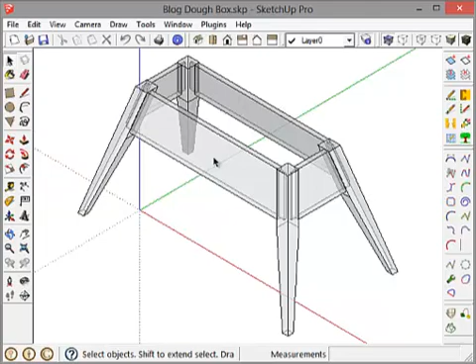So this week what we want to do, we'll go as far as we can, but primarily what we want to accomplish is put the sides on and put the dovetails in the sides. If we can finish the top, that'd be great.

Okay, so let's just start with the tabletop here. We need a top on this structure. So I'll start with the rectangle tool, and start on that corner, go to this corner. Now I want the top to overhang the legs by about 3/4 of an inch. So the perfect tool for that is the offset tool.

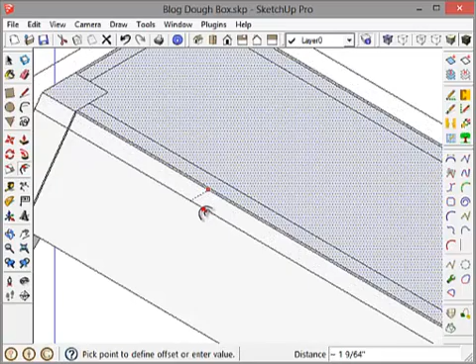I have to zoom in here. There we go. I'm going to bring it out 3/4 of an inch. Now I can get rid of the inside rectangle. Just click on it twice and it chooses the face plus its perimeter, and I hit delete. And now I can bring this rectangle, or this face, up 1 inch. I'm going to make this tabletop 1 inch thick.

And so right now I can make it a component. And for the moment, I'm just going to call it top.

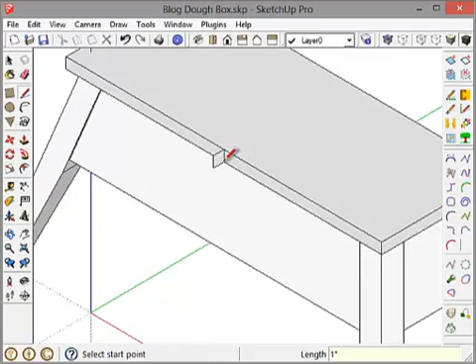And let's might as well put the trim on while we're at it. I'm going to draw a line between the center points of the top from the bottom to the top, and bring them out along the green, 1 inch, down along the blue, 1 inch, back in. That gives me a surface to work with.

Now I can take my, let's try the arc tool. Half circle right there. What I did there was I started at this center point and went out along the green axis until it said half circle. Now I can get rid of this.

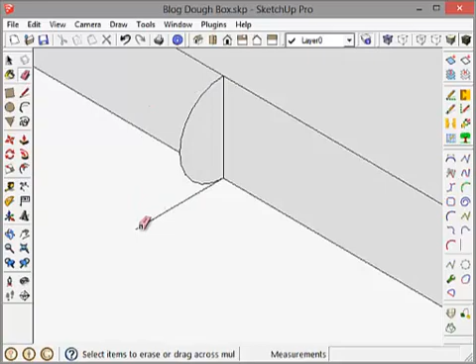Okay, now I once more want to choose a face. I can't choose this face here because it'll choose the whole top. What I want to do is create a face on the top. Now I can choose that face. Use the follow me tool. And I have trim. I have to choose that face and get rid of it. And for the moment I'm just going to make this trim a component. I'll just call it trim.

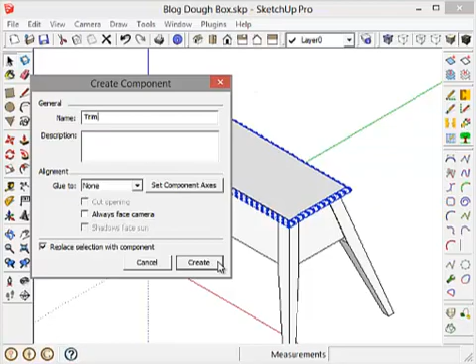Now we need to put the sides in the front and back on. We're going to use this same trick with the offset tool. I'm going to start this time with this rectangle that starts right there, that intersection, goes to the opposite corner. That should give me a face.

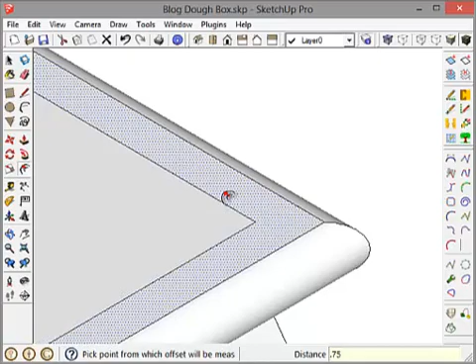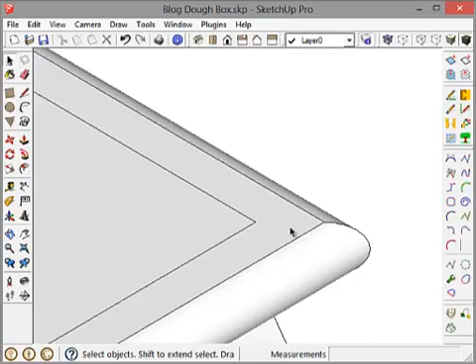And now I can take my offset tool. This time I'm going to bring it in 3/4 of an inch. And I'll get rid of this outside face and outside periphery. And I'm left only with this one.

Now, what I'm going to do, well, my side's to be 3/4 of an inch. So I'm going to bring a parallel line here, 3/4 of an inch.

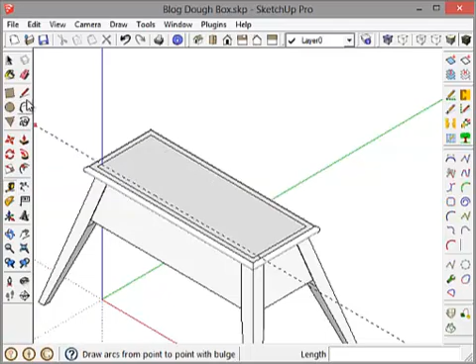And with the pencil tool, I'll draw this. Bring this up 14 inches. For the moment, I'm going to erase that, and this.

I'm going to make this a front. Actually, I'm going to call it front/back, and you'll see why in a moment. I'm having trouble with the keyboard this morning.

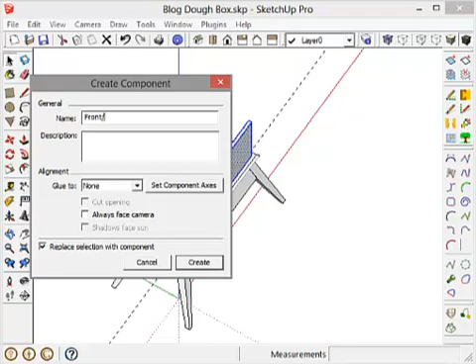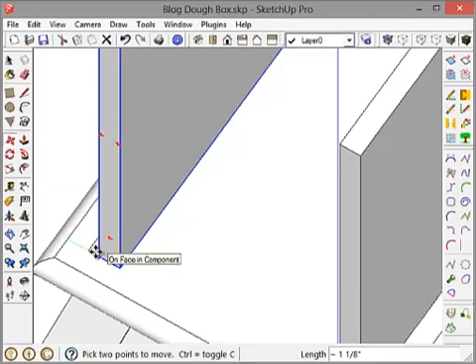And I'm going to place, move a copy of this. I'm going to use the Move Copy tool. Put it on this point right here. I'm going to flip it along green. And move it back so it's on that line. There we go.

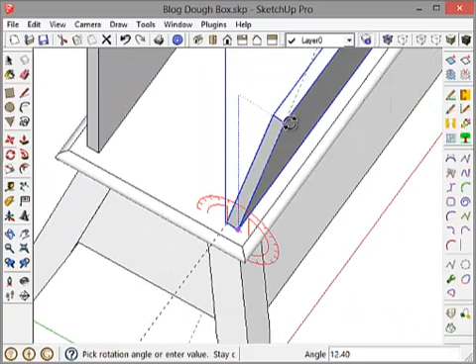The Rotate tool, and move that 15 degrees. And I'll do the same to the back. Notice, let me do that over. Notice the point I picked. I picked this front point right here, front end point right here. That's important because I want to pivot along that edge. So I've got to choose this same point back here. Whoops. 15 degrees.

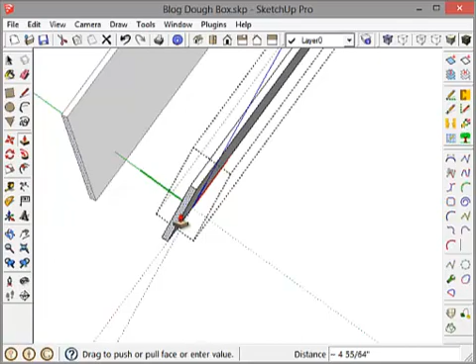Now I'm going to bring these, I'm going to go into edit component mode. I'm going to bring these ends out, an exaggerated amount. I'm going to say 6 inches, that's much more than enough. I'm going to go around to the other end and also bring it out 6 inches, much more than enough.

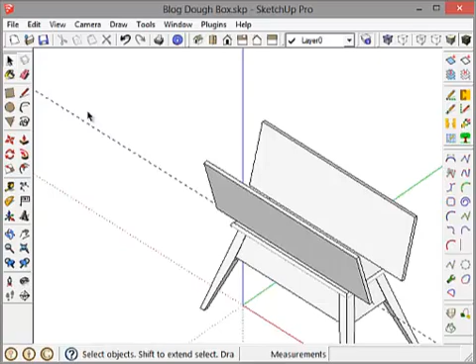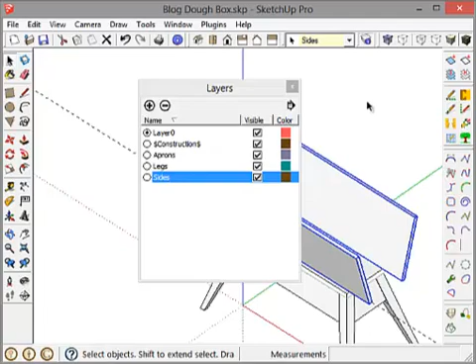All right, now that I've got those, I'm going to put them on their own layer. I'm going to create a layer here called front back. Actually, I'll put them on a layer called sides. If I bring up the entity info box, I'm going to change their name from front back to sides, and put them on the sides layer. Now get rid of the sides, because I want to do the same thing to create the ends. I'll go offline for a moment and do exactly the same thing to create the ends.

Okay, I'm back, and I've created the ends. Just to show you now what we're attempting to do, I'm going to bring the sides on. You notice the reason I extended these 6 inches was because I'm going to want to use where they intersect to shape the ends.

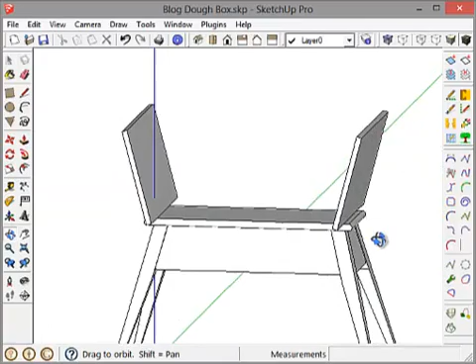But before I do that, I've got another problem. Let me get rid of the sides to show you. I rotated both the sides and ends 15 degrees along their outside edge. You notice that kept the outside edge on the tabletop, but the inside edge is lifted. That's true on both ends. And if I were to bring the sides in, you'd see the same problem, only the outside edge along the sides would be touching the top, and the inside edge would be lifted.

Well, I'm going to correct for that right now. By the way, this end here is going to be a throwaway because of the nature of these tilted things, and I'll show you in a moment. So let's go into edit component mode.

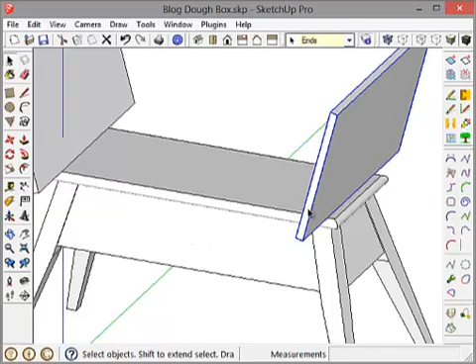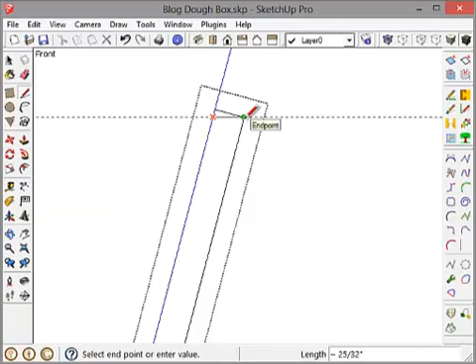Okay, the first thing I want to do is look at this from the front. Notice, because I tilted things 15 degrees, that this edge is now above horizontal. Well, to fix that, let's use the rotate, or the protractor tool rather, and make it 15 degrees. Now we can use the pencil tool, and with the push-pull I can trim that off, much like I would do on the table saw.

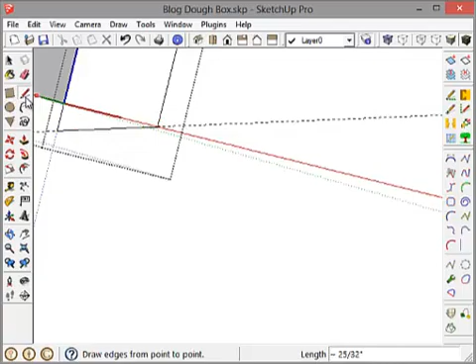Down here I've got a similar problem. So again, I'll use the protractor, come down 15 degrees. This time I have to add a line from here to here and then over to here. Now I've got a face, and I'm going to extend that face all the way to the end.

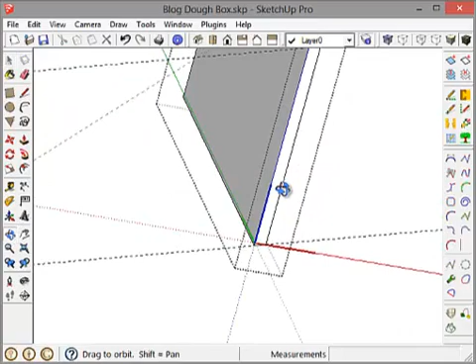I have some lines I have to get rid of. First, that one right there. And while you can't see it, there's one there, and one on the other end. This was because of how I added that little piece. I want to get rid of that one too. Okay, get rid of my guidelines.

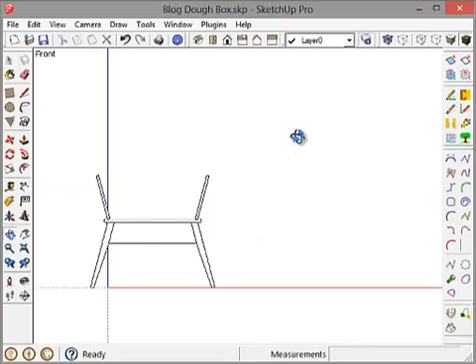Look at things from the front. Everything's fine on this end, but this end, not so much. That's okay, for now we'll just leave that there. No, let's replace it, let's replace it.

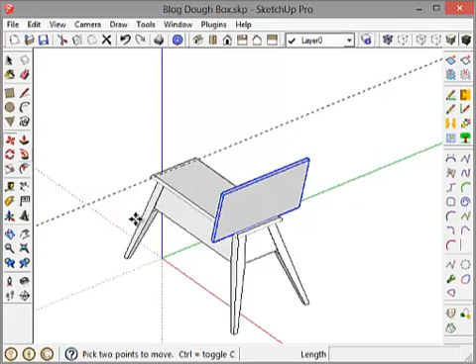What I'll do before I replace it, I'll put my guide down, right there, 3/4 of an inch. Let's get rid of this one. I think the easiest way to do this: select this, use the Move Copy tool, move the center line here along the red axis until it's on that line.

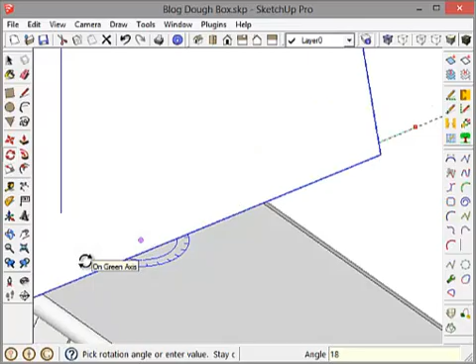And then I'm going to use the Rotate tool. Hold the Shift key down, find that center again, come out here, type 180. Let's see if that did it. That looks pretty good. There we go, now we'll delete the guides.

Okay, now I'm going to do the same thing to the end, or to the sides. So I'm going to go offline again and do that instead of wasting on-camera time. I'll be right back.

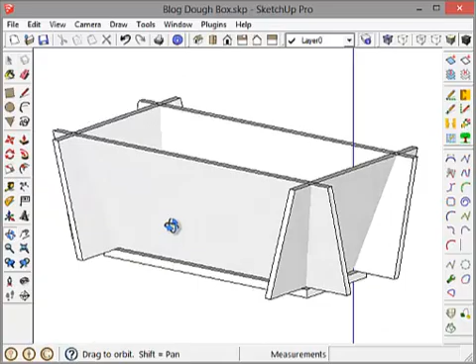Okay, I'm back. We got everything fixed, and if we examine this a little bit, we'll see that things sit nicely now. All the edges meet up here, and we're ready to give our ends shape. Now there's a couple ways I could do this. One is I could use the Edit Intersect Faces tool, but that will be a little sloppy, because if I used Intersect Faces on this end here, I'd get geometry on both the inside of this side copied onto the end, and also over here copied onto the end. So I'm not going to use the Intersect Faces tool.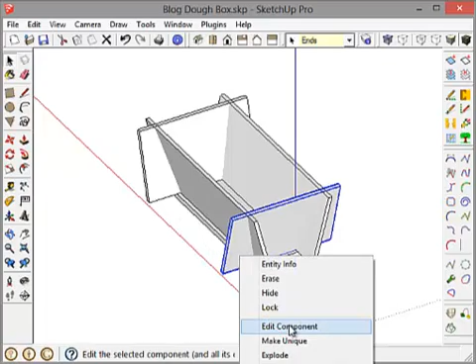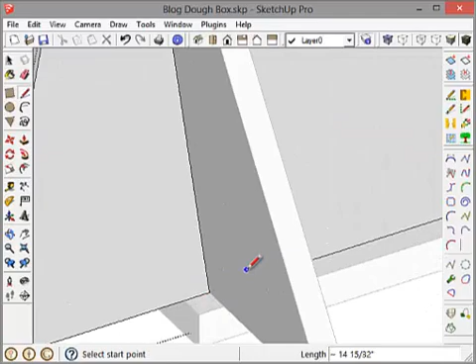Instead, I'm simply going to go into Edit Component for the end and bring back the rest of the model. I'm going to use the pencil tool to give me the lines I want. Get that intersection, that intersection, and I'll come around here and do the same. The Intersect Faces tool is pretty powerful, but I avoid it when I can. There's almost always cleanup, and in this case, not so much cleanup as extra lines you have to deal with. This is just as easy.

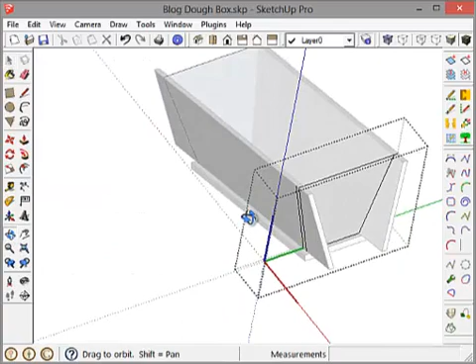Now, if I look at this from the left end, and use the Select tool in this fashion, I think I'll be lucky. Now let's see what I've got. And exit Edit Component.

I seem to be missing something here. I'm not sure why. Not sure what happened here. Oh, yes, I know what happened. I lost the line around the top and bottom. We'll have to put those back in. And that was because of the way I... well, let me just back up and show you what happened there.

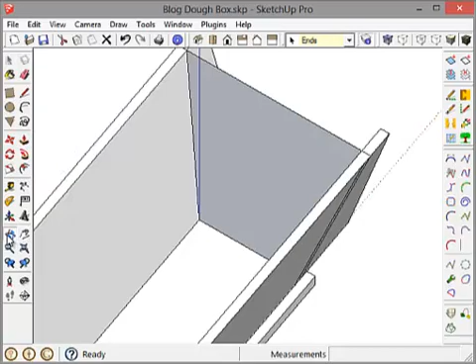See if I have all my lines. Did I not get this line? Let's just put it in here. All right, let's one more time make sure I have all my lines.

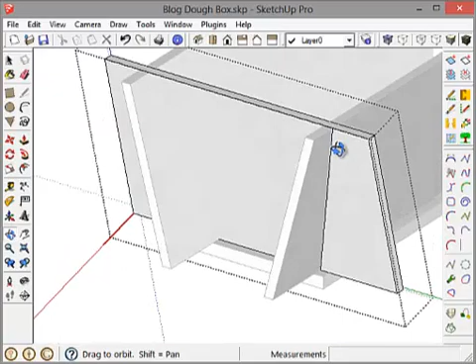I do want that line. I want that line. I don't want that line. I don't know, maybe that was the problem. I don't want that line. I do want that line. I don't want that line.

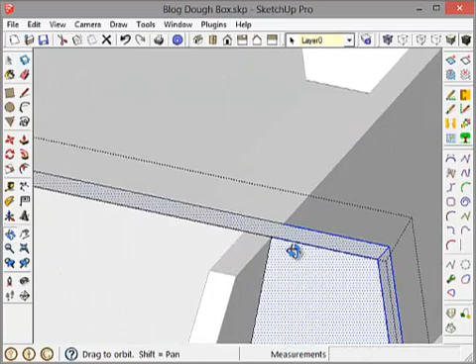Okay. Now here's the problem that I created before. If I look at this from the left end and use my select tool, notice I didn't have lines here, which I need to put in. I'm probably going to convince myself the Intersect Faces tool may have been a good choice.

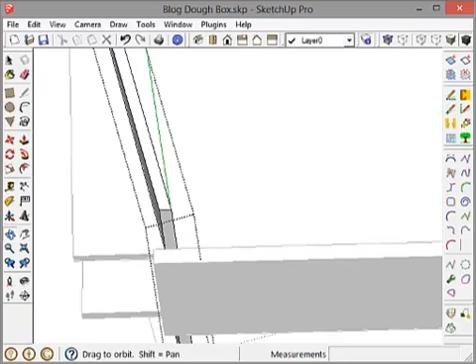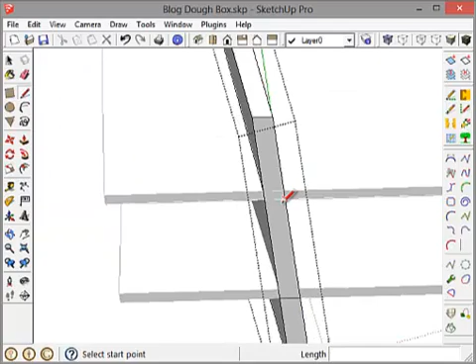Let's get rid of the bottom, or the top actually. Not sure why I don't see that one so well, but it's there. Now I need this one.

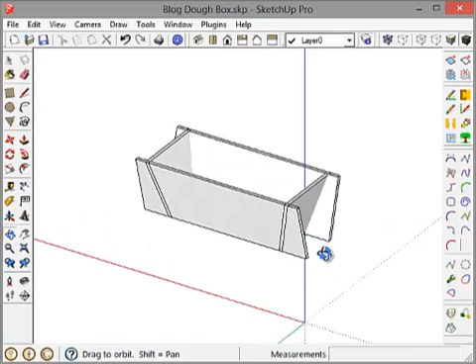Okay, now if I go to the left end and do my thing again, it should be okay. That looks much better. And I have it fixed down at the other end too.

So now I'll do the same thing to the front. Go into edit component mode. This time I'll be a little smarter. Put all my lines in. I'll even start with this one.

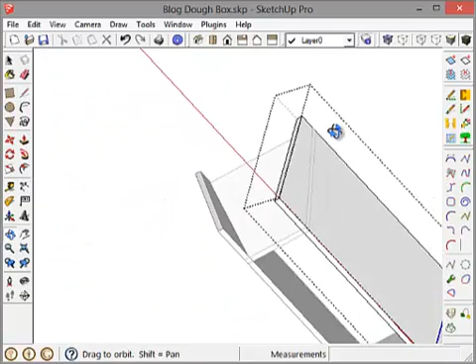There, 4 lines, that should have done it. Go to the other end. Last line.

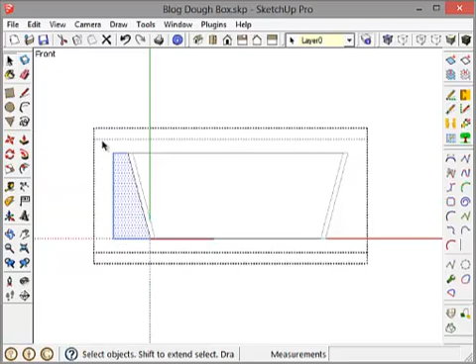I look at this from the front. I can use my select tool. And again, use my select tool. Exit. It looks like I've got exactly what I want.

Now notice I overlap these ends because that's where the tails and the pins are going to go. And so now it's time to do the tails and pins. The question is, are you a pins first or a tails first guy?

Well, I'm going to draw the pins first here. And the reason I'm going to do that is because I can avoid having angled pins if I do that. If I draw the tails first, then the pins are going to come out and slope down. And that's kind of cute. May even look good, but it's going to be harder to cut. So I think I'll do the pins first.

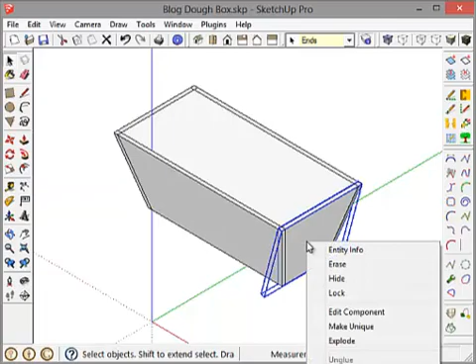To do that, let me get rid of, well, let's just go into edit component mode here. Hide rest of model. And let me look at this from the front.

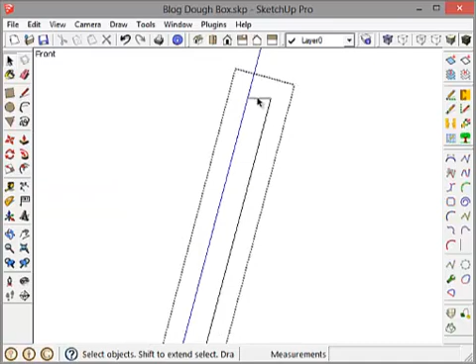Okay, what I'm going to want up top is a half pin. And on the bottom, I'm going to want a half pin. Now the half pin up top, let's start with that. What I'll do is I'll bring this down. Bring it down. Oh, let's say a half inch.

And let's bring this one up a half inch. And let me just do a little arithmetic here. Okay, I did a little calculation off screen, and let me tell you what I come up with.

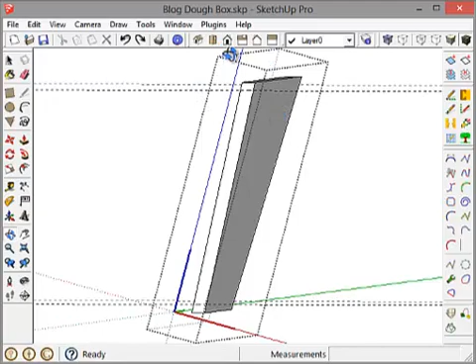First of all, I'm looking at this from the front, just so you can see what that means. Let me rotate it. That's my end piece. And I'm going to put the pins here. So I'm going to look at this from the front. When I look at it from the front, I'm not actually looking, well, let me say, you can see this front edge slopes in. So when I look at it from the front view, this bottom edge is sloping away from me.

Okay, so let's start out. This is a half pin. This is a half pin. Between them, I want 8 tails. And of course, if I have 8 tails, between those tails are going to be 7 pins. What I'd like to do is calculate what I'm going to call a cycle. That is, a tail and a pin is a cycle. Tail and a pin, cycle. Tail and a pin, cycle. But I've got 8 tails and 7 pins. That's not an even number.

Well, if I make my pins a quarter inch, what I can do is I can correct for that and use a trick. Let me show you what I mean. I'm going to use the tape measure tool, zoom in here, and put down a guide point. I'm going to start at that intersection right there. I'm going to come up along the edge. I got to be on the edge. To make sure I am, I'm going to start at that point right there, and I'm going to type 0.25. And now I've got a guide point here.

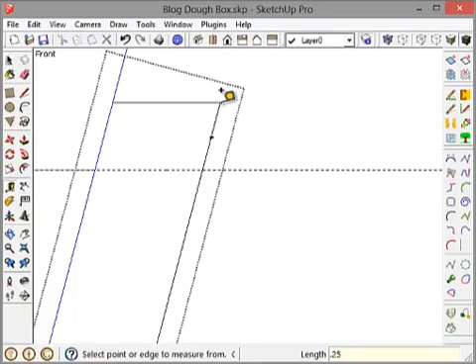This represents the 8th pin. So now, between this line and this line, I can have 8 tails, 7 pins, and an extra pin up here. That's 8 and 8. 8 tails, 8 pins. Knowing that, I can take my line tool, start at that guide point,

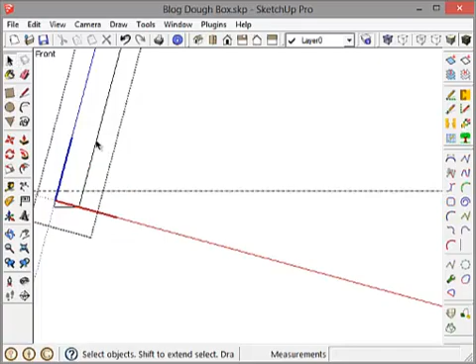come down to this point. What I've done now is created a line that extends between these two guidelines, but overshoots this one by 1 pin. So now I got room. If I subtract that one, I've got 8 tails in here and 7 pins. Well, I'm not going to divide that line mentally — I'm not going to do mental arithmetic to divide that line. Look how long this line is.

Approximately 13 43/64. If you want to divide that by 8, go ahead. I don't, so what I'm going to do is select this line, right click, say divide, and type 8, enter.

What I've got now is 8 separate lines. The last one, by the way, extends over this line by 1/4 of an inch, so I know my last tail is going to end right there. My first tail is going to start here. So let's draw in the tails.

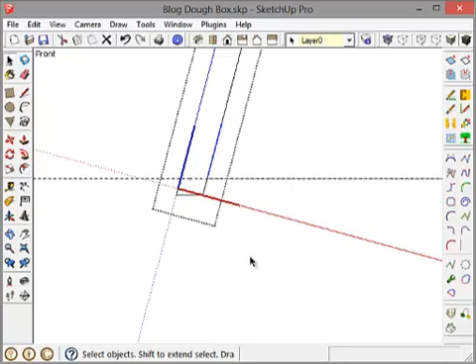I'm going to take my protractor tool, hold it over the end so I get the black protractor, and that takes the plane of the slope of that edge. I'll come down here, go to a perpendicular, and come up 8 degrees. I'm going to do the same here.

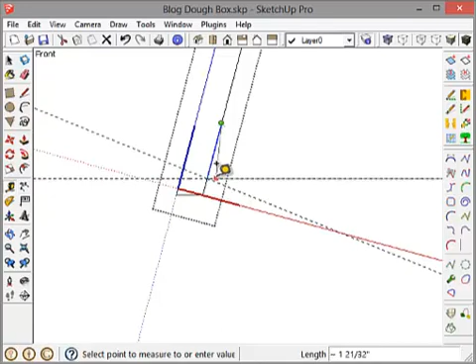No, I don't want to do the same there. What I want to do is first use my tape measure tool again. Remember, this cycle includes a pin, so I'm going to subtract that pin out of there. I'm going to type 0.25, that's the width of a pin.

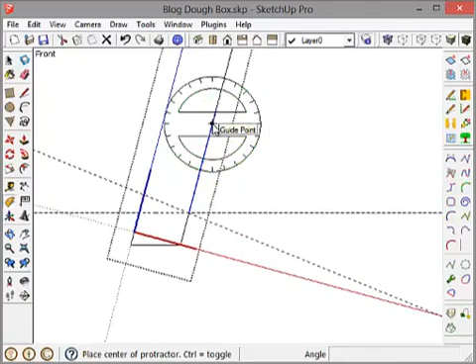Notice what it did is it put a guide point 1/4 of an inch from the end of this line. Now I can use my protractor, come down 8 degrees. All right, now I have my first tail.

I'm going to construct it here. I believe I can get rid of my guides at this point. I'm pretty sure, let me see. Okay, now notice if I go along this edge up from here, there's a midpoint, there's an end point.

What I want to do is select this line, add this line to it. Now I'm going to copy those, starting at this point right here, the low point. I'm going to slide up, that's the midpoint, that's the end point. I'm going to place it there.

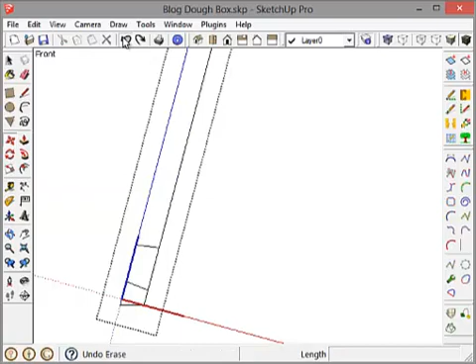My mistake, my mistake. Where I want to place it is not there. I want to place it at that guide point that I erased. All right, let me get that back. There's my endpoint, that's the endpoint I wanted to go to.

Select that line, select that line, control key. There's the endpoint I want. And now I want to type 7x, enter.

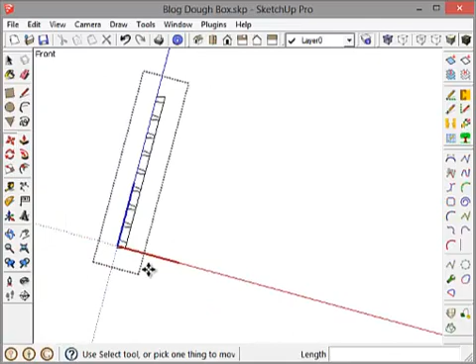Notice what that did up here is it put my last tail right in that point, which is what I wanted. Now I can delete my guide points and guidelines. Notice my half pin down here and my half pin up here is slightly different shape, and that's because of the beveling of this.

Now, what I'd like to be able to do is just push-pull these in a half inch. You're going to see I'm not going to be able to do that.

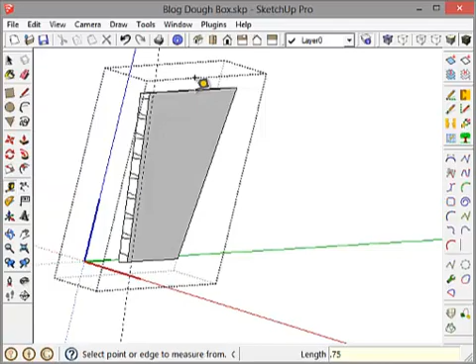Let's first of all create a half inch line. I want to make sure I'm on that face, so I'm going to choose that center point up there. And I'm going to type 0.5 - I'm sorry, 0.75. These boards are 3/4 of an inch thick. I'm going to do the same thing on the other side.

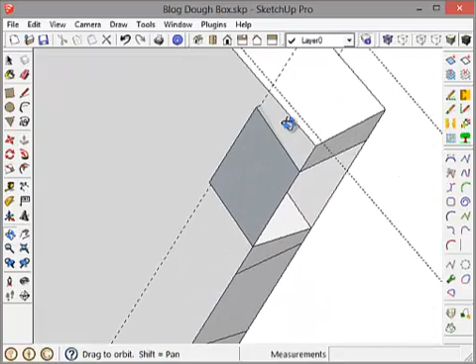There we go. Okay, now it would be nice if I could, for instance, choose that tail, move it back to this line. But I can't quite do that. Look what happens - I've got some protrusion there, and I've got some leftover here.

And the reason for that is because, again, every place we look, when you use the push-pull tool, what it does is it moves a face along a vector that is normal to that face. But everything about these surfaces are at an angle. They're not rectilinear, so using the push-pull tool is impossible. Let's back up.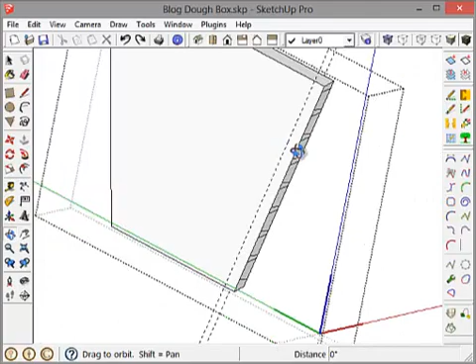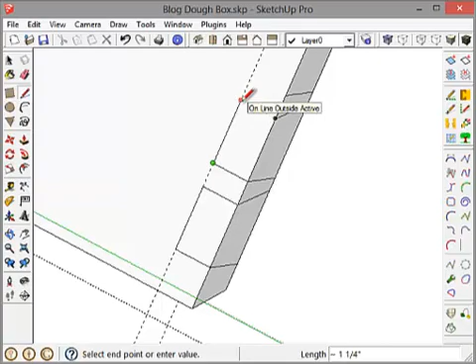What we're going to have to do is the hard work of creating a bunch of lines. The easiest way to do that is to let the Inference Engine do most of the work. I'm going to start at this point, come out here along the green, click, then come up here to this point and move it over till I see the green line and on line, and then create that line. I'll do it again, click, pick up a suggestion here for the Inference Engine. And unfortunately, I've got to do this on both sides, and even then I'm not done. I'm only going to do one - oops, shouldn't have done that.

Again, I shouldn't have done that. These repetitious things don't work out so well. I'm not a big fan of repetition. Well, maybe I'm a big fan of repetition, but I'm not good at it.

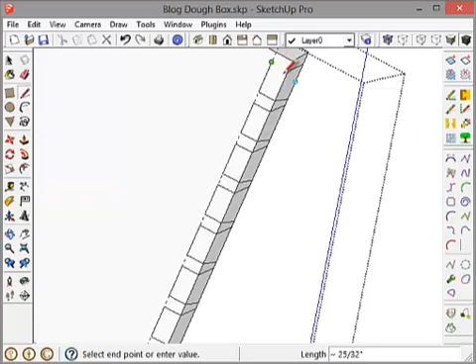Now I have to do that to the other side too. I'm going to go offline and do that. All right, so I'm going to go offline and do this. I'll be right back. I'm back.

And what would be nice is if we could take the eraser tool now and just erase these two lines. But notice when I do, I've got lines I've got to connect here. And I'll connect a couple of them, then I'll go offline and do the rest. So I just start here, here. When I do that, I get a face.

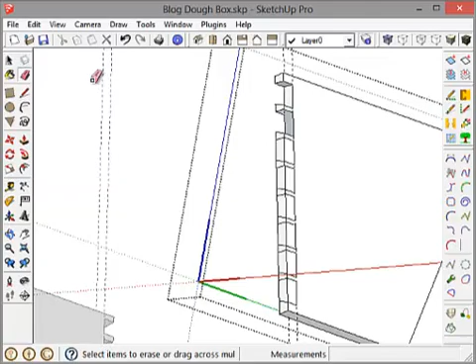Well, there we go. I got my first tail socket. And I'm going to do one more to show you I can get the pin. There we go. We have a pin, end pin, pin.

I'm going to finish this up, and then I'm going to use a little trick. Well, maybe I'll come back to show you the trick. Okay, I'll be right back. Now, while I was offline, I finished this up, brought the sides in.

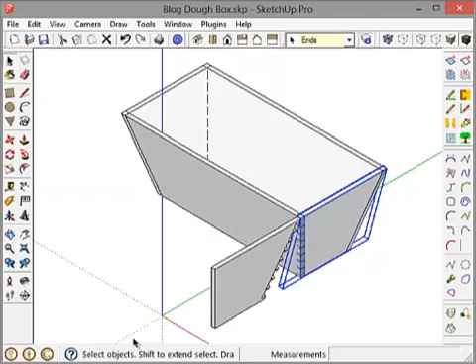I took this component with it and made a copy, moved it along the green axis, and then flipped it along green. And then I just connected them here.

And notice if I look at this from the end, and get my sides out of there, there you go. Notice they're the same, only flipped. Well, it would be nice, by the way, what you're seeing right there is the other end one that doesn't have, there you go. It's the other end, it doesn't have the fixes, or it doesn't have the pins on it yet.

So now, in our traditional way of doing things, what we would do is take this component, move it over here, so the pins are over here, and then make one of them exploded, and use faces, intersect faces with selection. And then we'd use the push-pull tool to push the ends in.

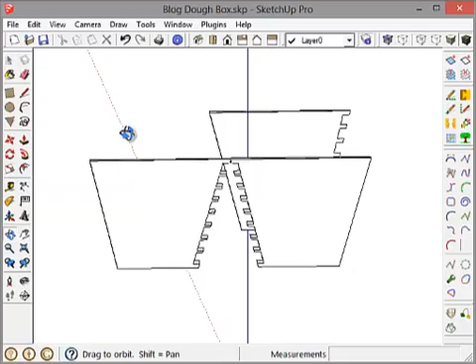Well, the push-pull tool doesn't work. And I don't want to go through all that work that we did before. So here's what I'm going to do in this case. I'm going to go into Edit Component mode. I'm going to find the center of this thing.

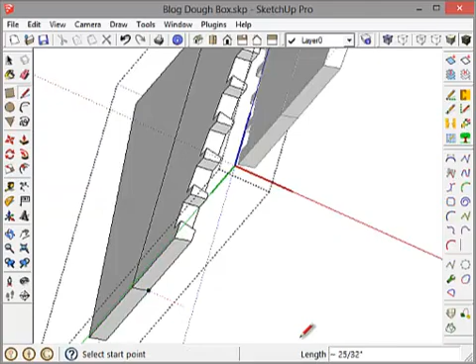One more in the bottom. Going to look at it from the end. Let's see, the other end, I guess. Here we go. Now I'm going to select this.

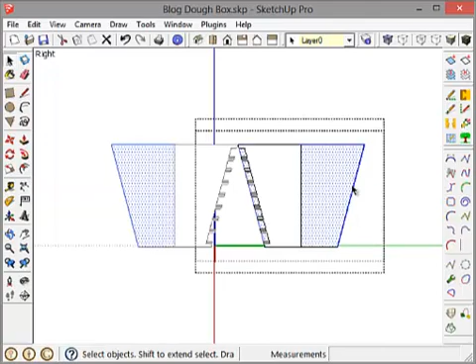Notice what we have. Not sure why that didn't go with it, but we can fix that. Okay, now what I'm going to do, leave edit component mode.

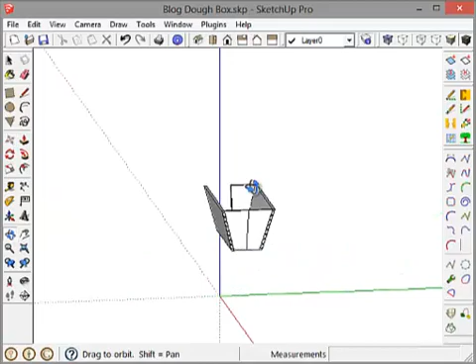Move this one over to here. Before I glue them together, let's just bring the sides in. Make sure this is going to work. Looks good.

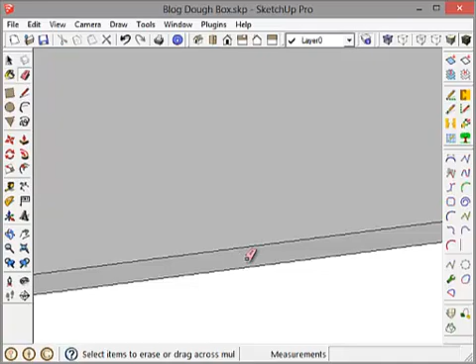All right, so what I'm going to do is I'm going to explode both of these. I'm going to get rid of these glue lines. Would that I could in the shop.

And of course, now what I'm going to do, make component. You can't see it down here, but I'm making component. I'm going to call it end. It will complain that I already have one. That's interesting, it didn't complain.

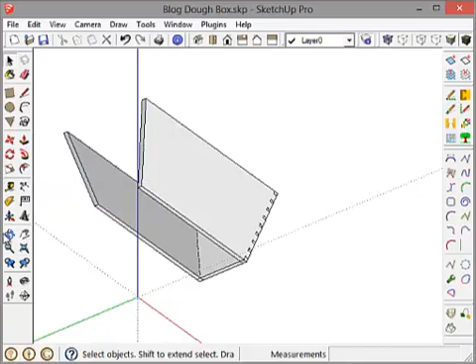Why is that? What is this called? Oh, I guess I called that ends before with an S on it. Well, I don't want ends. I want end. So I'll get rid of that one. Got a naming error there. All right, now I can move this one down.

And let's just see. Let's just see if the flip along works. We're going along the red axis. We'll flip it along red. Move it back into place. And there.

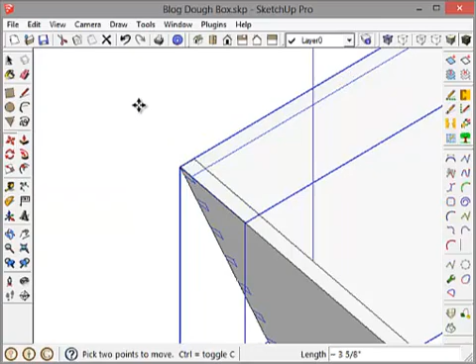We have it. Now it's just a matter of using the intersect faces with model and cutting, getting the pin lines on the front and then erasing the lines I don't want. Again, you can't use the push-pull.

Let's see, can I use the push-pull? No, you can't use the push-pull. So it's just a lot of intersect faces with model. What I would do is I would explode this one, select this and all of this, intersect faces with selection, and then erase the lines I don't want here.

And I'd have to do that at both ends. Well, I think I'll leave that to the student to do offline. This video is getting long right now, and intersect faces with selection or with model is not something new. You know how to do that. I'll do mine offline, clean up the model, and we'll pick up and finish this thing off next week.

And when we do, next week I'm going to explain what we have when we're all done. That is, what all the angles look like in this model, and what you might have to consider when you're actually cutting this on the table saw or wherever. Because this is a fairly complex model, and the compound miter saw or the compound cuts on a table saw can be a little confusing.